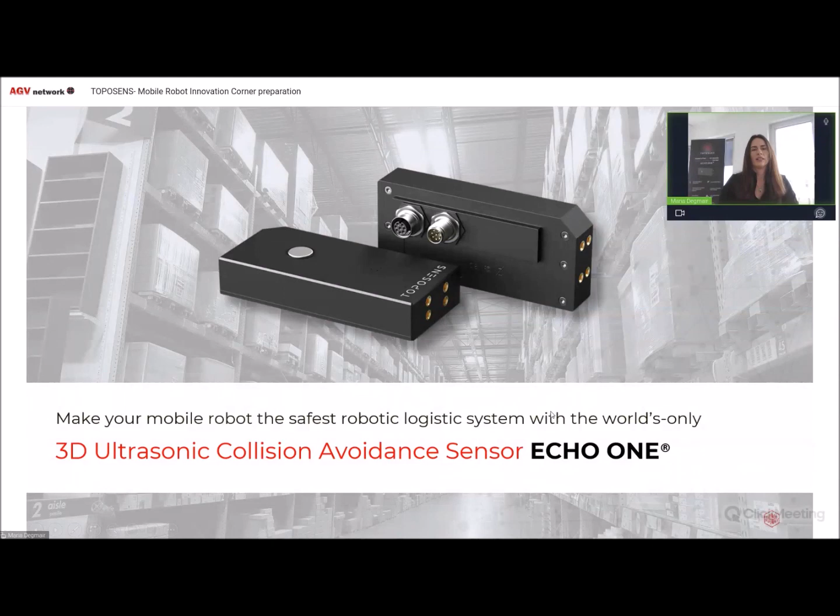Now, going straight into it, this is it. This is our, or should we say, the world's first and only 3D ultrasonic sensor for collision avoidance in mobile robots. This is what it looks like. And now, why is there a need for that at all in the current sort of market?

Now, the problem is, as we all know, and everybody working with AGVs and AMRs and anything that moves autonomously, is that there is always a risk of collisions, especially in busy factories and warehouses. And when these collisions occur, the costs can usually be very, very high. We have a figure here: anything from 100K to up to 1 million per year per factory, highlighting the need for a collision avoidance that is adequate enough to get this figure down.

And where we have problems mainly is with, as we know, anything that moves autonomously across the floor needs sensors to sense and navigate around the path. And there are different types of sensors based on the underlying physics. The main sensors used these days are optical sensors, such as lidars and cameras. They do have difficulties, and this is only due to the physics behind them.

They do have difficulties detecting when the environment conditions are not ideal, when they're unfavorable, and when the surface is of a certain structure that makes it a little bit more difficult for these optical sensors, such as transparent surfaces, mirror surfaces, or when the lighting conditions are too bright or too dark. As a consequence, objects such as the forklift forks that are typically black are difficult to detect. And that poses a risk of damage to AGVs or in mixed operations, also when workers are around and about.

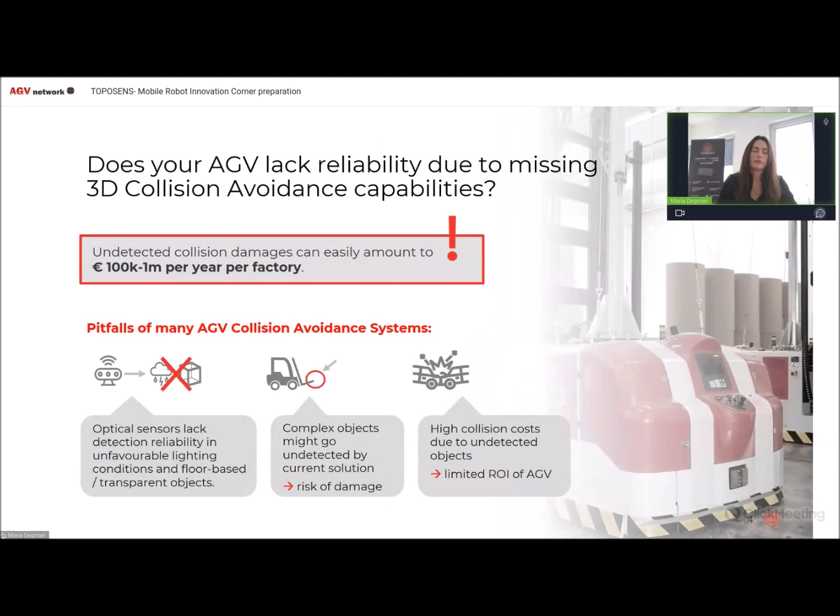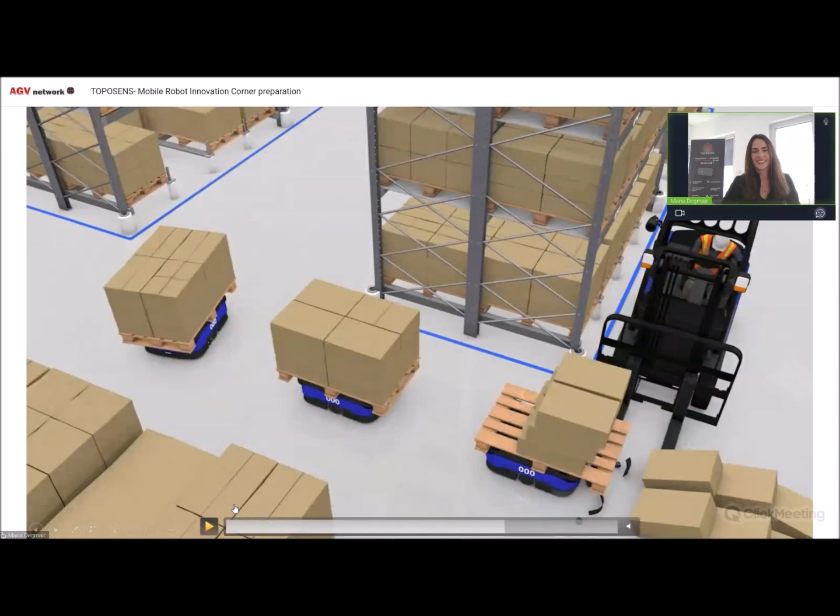Now, that in turn limits, as you can imagine, the return on investment on AGVs and AMR systems as a whole. Now, this is what can happen, as you can see here. I'm just going to pause this video now, so you can get the idea behind what I'm saying, which is when you have the very important 2D safety lidars that any really well-functioning system should have anyway.

They, as the word suggests, sense on a 2D plane. So anything above or below that 2D plane does not get detected. So if we have forklift forks coming in from the side at a height that is below or above the scanning plane of that 2D LiDAR, then this can happen, as you can see here. So basically, that's just a quick video, so carry on from there.

And this is where the ultrasonic sensing comes into play. Now, just quickly diving into the physics behind it. So it is based on time of flight, combined with triangulation. And then what makes it so special is the patented algorithms that we have in our processing unit behind it.

Now, as you can see here on the bottom, that little bat, you may wonder why there is a bat, but it's actually quite simple and straightforward. We all know bats fly at night in total darkness, unaided by anything other than their own inbuilt sensory system. We call it echolocation.

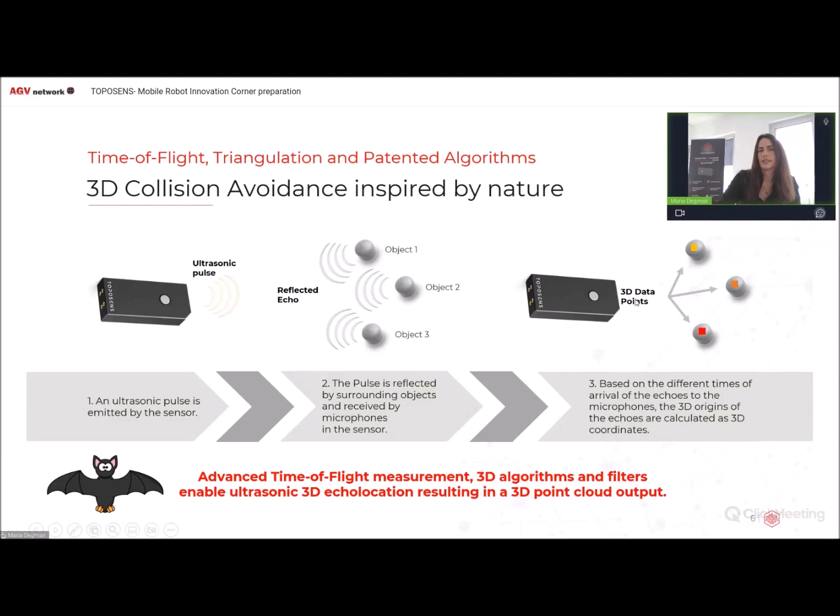So you don't just get the distance from an object, but also the height relative to the sensor, and whether it's to the left or right of the sensor, relative to sensor positioning. So you have the X, Y, Z coordinates. That is what we call our turnkey 3D collision avoidance system.

So with the system you get from us, you get the sensor just shown, and then the collision avoidance software, housed in this Toposens processing unit here. That makes for very safe operations on top of other sensors you may have built into your system already. Now, just a few key specs that are very important to note.

The detection range we have is anything from near field up to 3 meters. This is normally with a 75 millimeter pole detection, so we have this reference standard case.

And then the field of view in the near field is important to note, because we offer a sensing solution that is very good for the near field, which is very important in collision avoidance. So you cover that space right in front of the sensor, right in front of your AGV or mobile robot, whatever you have, and at that close distance you get a coverage of up to 160 degrees, which is a very large opening angle.

As you go further away, closer to the 3 meter detection range, it reduces to up to 110 degrees. This is purely based on the physics of ultrasound, and I'm going to show you a video in a minute where you can see the opening angle based on the physics of the ultrasound wave.

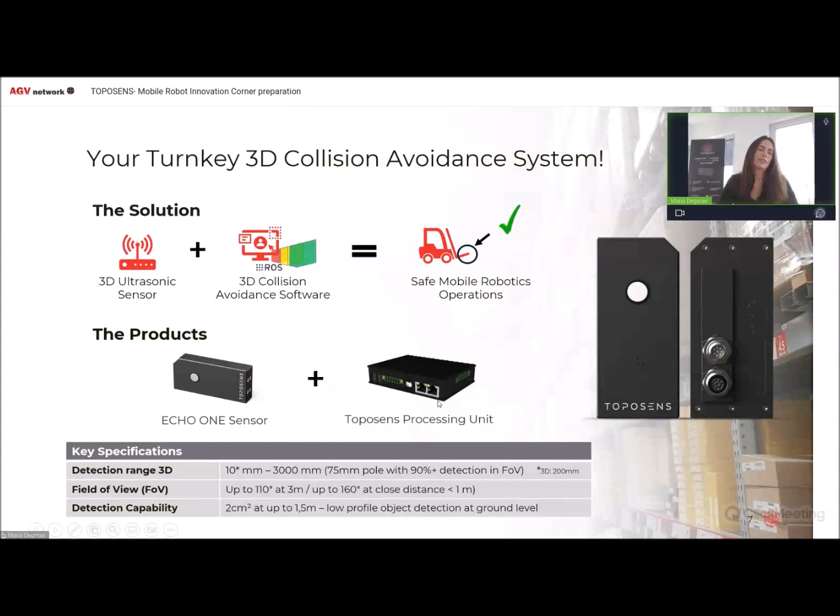Now, this system, as I've mentioned, with the processing unit, is very easy to use as well, because you get with it a graphical user interface, so you have that GUI here. Let's quickly go over that. And if you want more information at any point about the technology, you can see us at Logimat, but I'll get to this in a minute, or drop us a message or give us a call.

But just to guide you through this quickly, here you have the region monitor view where you can set your regions. Important to note is we have 2 zones: a warning and a stopping zone. Anything detected in the warning zone, the system, our collision avoidance system, will trigger an input to the mobile robot to slow down.

Anything detected in the inner zone, which is a very important zone just in front of the sensor, triggers a stop command. So here you have a warning command, and here you have a stop command. These are where you can set the zones.

These 2 zones are dynamic and freely adjustable, up to a maximum of 3 meters, as I've said before. You can also adjust the height, depending on where your sensor is set on the mobile robot, and the length. This is like a top-down, bird's eye view, and you can also set the width. Now you have your different filter settings depending on use case and what you want to get out of it.

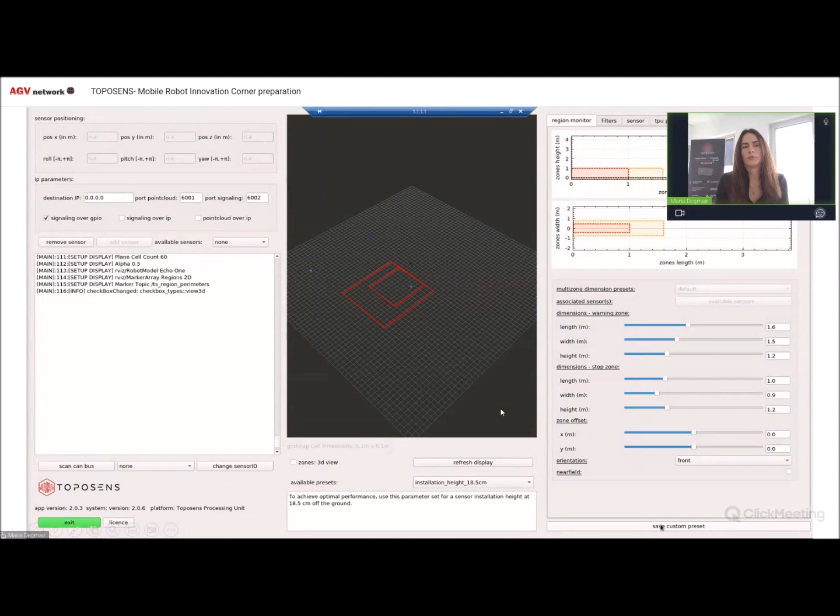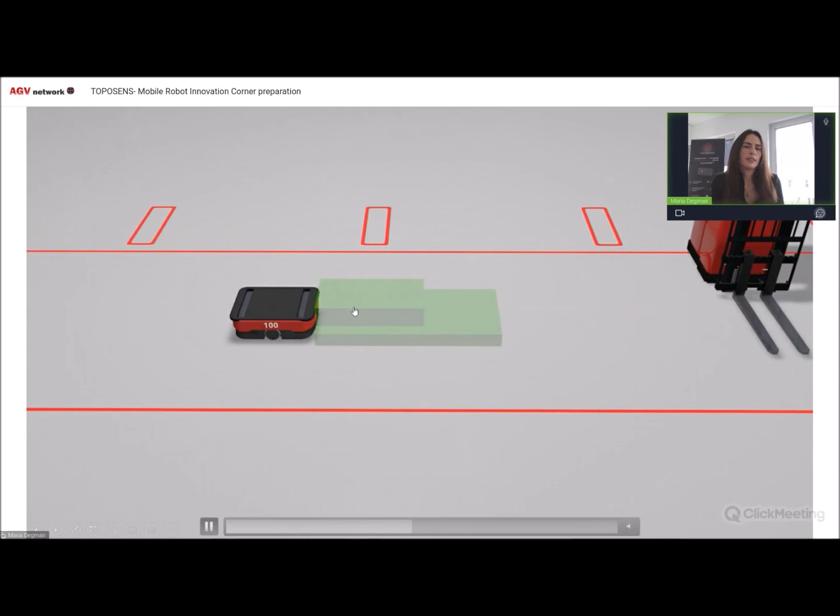Now, this is just a little video in between the slides to show you exactly what happens. This is a little AGV, the top load, and here you have these zones - the stopping zone and the warning zone. I'm just going to pause this. You can see these forklift forks are detected. This is how it works in principle: they're detected in the outer zone, and then also detected in the stopping zone. So the AGV has already started slowing down, and now it is actually stopping.

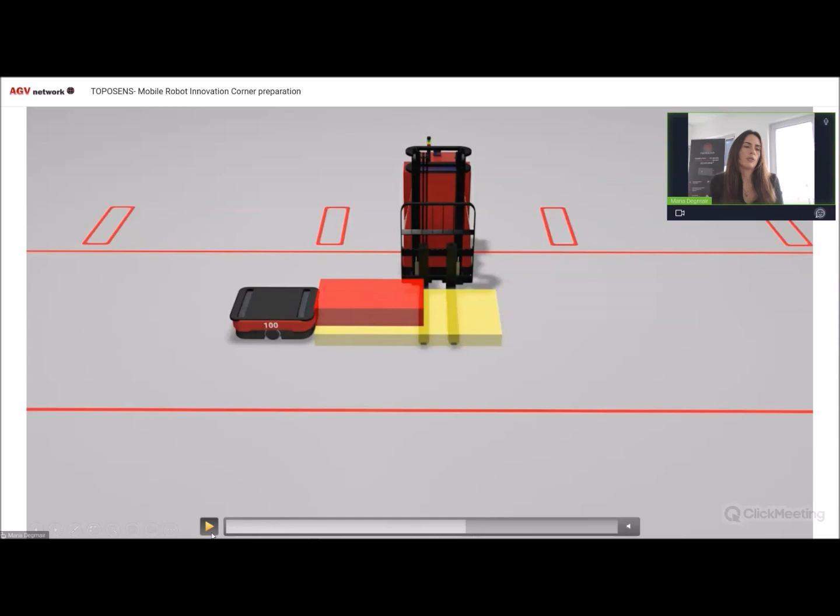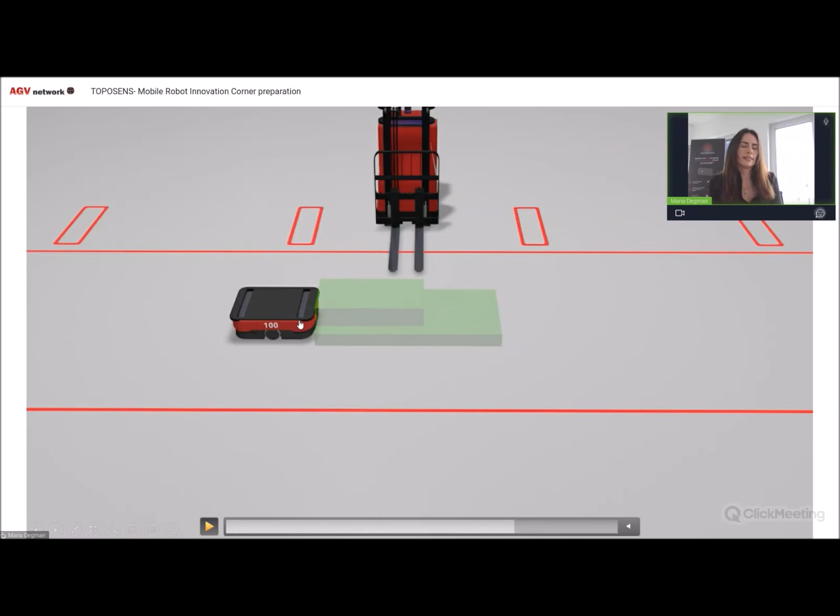Once that object, the hazard, is removed, the system triggers an off signal. So now the zones are not violated anymore - it's on/off, basically an IO signal. The coast is clear, so to say, and the AGV then moves on again. Here we have the same with pallets, for example - that makes the AGV slow down and stop, and then once the coast is clear, it'll move on again.

Now, just to go a little bit over the advantages that our system offers compared to other sensor systems - as I've said before, in terms of 3D collision avoidance, you have the problem of reliable detection performance. With this system, due to the physics and the sophisticated algorithms behind it, we can see small and difficult-to-see objects very well.

As I said in the beginning of my presentation, optical sensors, although they work really well in other situations, when environmental conditions are not favorable, such as lack of light, have great difficulties detecting certain objects. Sound-based sensing is practically immune to that, because this is just the nature of physics - sound travels through anything and gets bounced off anything, regardless of any light or non-existent light.

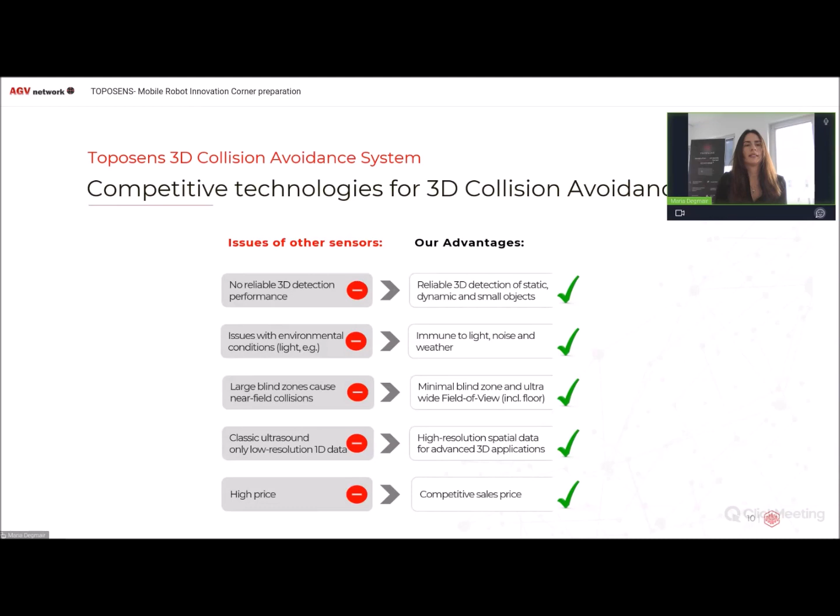And we are competitively priced compared to a lot of more expensive sensor solutions, and that's just due to the hardware as well and the way it's set up.

Now, what I've told you about the advantages can very easily be whittled down to three key benefits of our USPs. The first one is we look at this in terms of detecting the undetectable, where other sensor systems have difficulties detecting, we can detect these undetectable objects. And we offer full coverage, navigation in difficult surroundings, and short sensing from 20 centimeters on, which is a huge benefit that any reliable, safe AGV system should have anyway.

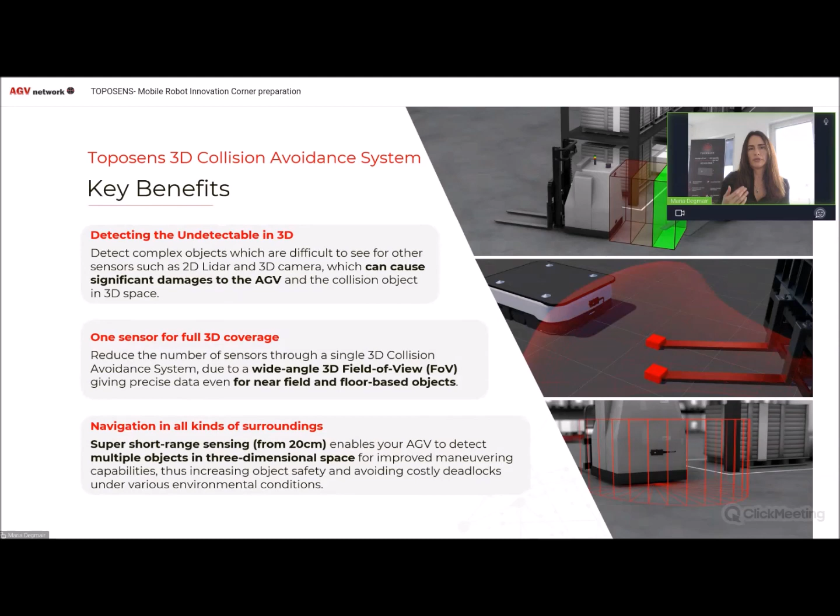And that in turn gives you this really good customer value that you can convey to your customers, that you can have improved satisfaction because your AGVs are equipped with these sensors and other optical sensors. You should always have a 2D safety LiDAR anyway with it, but this just rounds off your perfect mobile robot sensing solution.

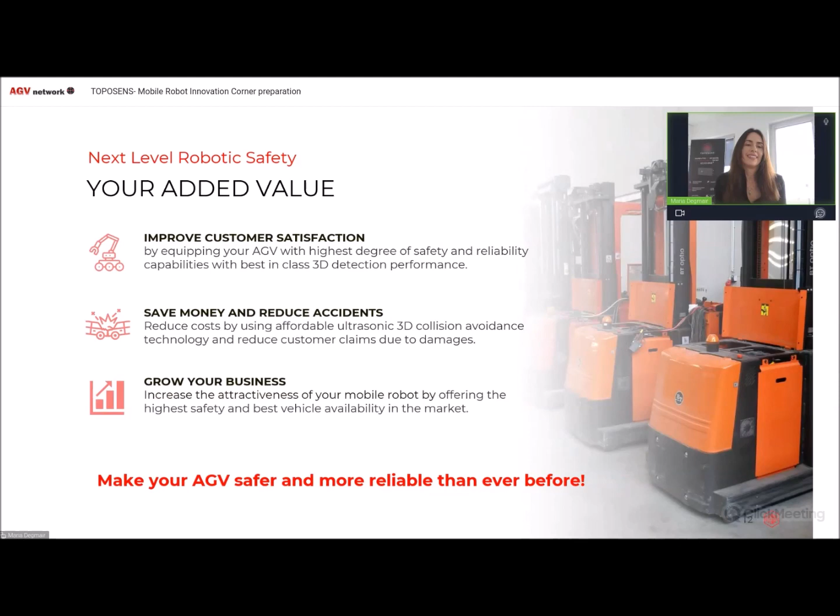It saves you money and reduces accidents, I've already covered that, and obviously with that you can grow your business. So basically that is what it's all about in a nutshell.

Let's not forget, in this webinar we're not going to go too much into the finite details of it all, but if you have any questions, always get in touch with us, or see us at Logimat. But yeah, that's basically what you get with our system.

So you get that sensor, you get a processor unit, and it's also worth noting that it can be used as a standalone system. So you get the I/O ports that signal you the zone violations - either zone violation is on, when something is detected in the warning or stopping zone, or you get the off, so the coast is clear again, if an object has been removed or another AGV has crossed the path successfully and is out of the way.

Or you can use it in a sensor fusion version, and then a pre-processed point cloud is accessible via Ethernet. You can also use this system as a retrofit if you've already got your AGV system with LiDARs incorporated, or cameras, whatever you may have, and you just want to add this extra layer of safety with an ultrasonic sensor. You can also have that design-in version if you start from scratch and put it all together and use it like that.

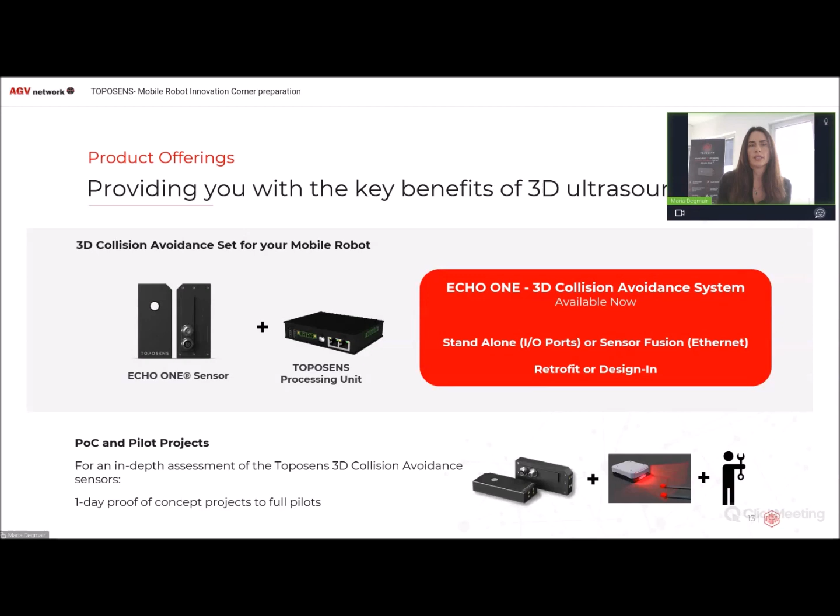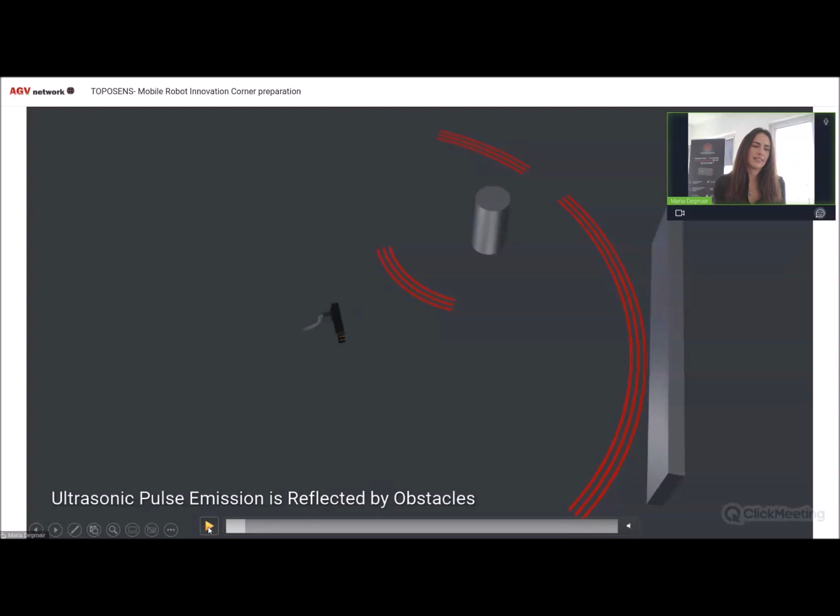Now I'll just show you another video that will nicely put everything I've said into a visually pleasing video. I'm just going to pause this because, as I said at the start of the presentation, this is how the physics work, and I always find it's much better to visualize it than to just get told about it.

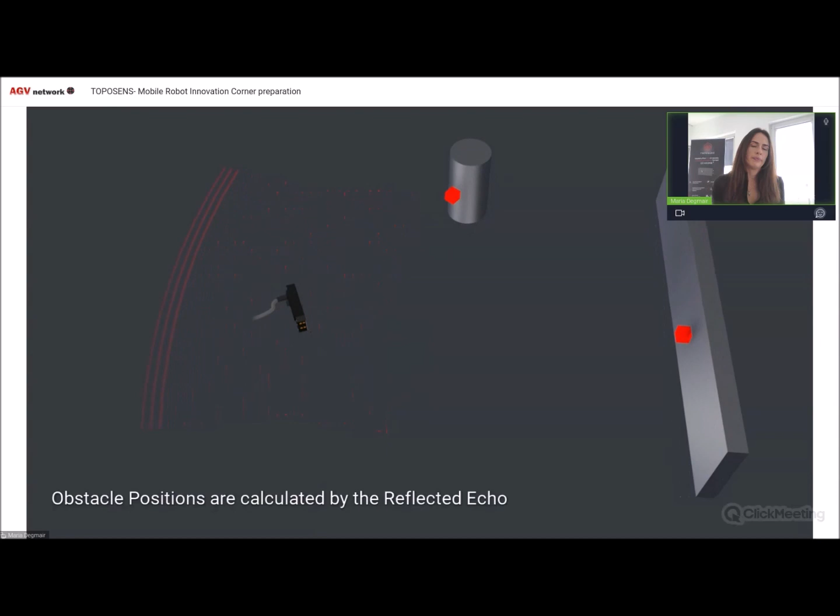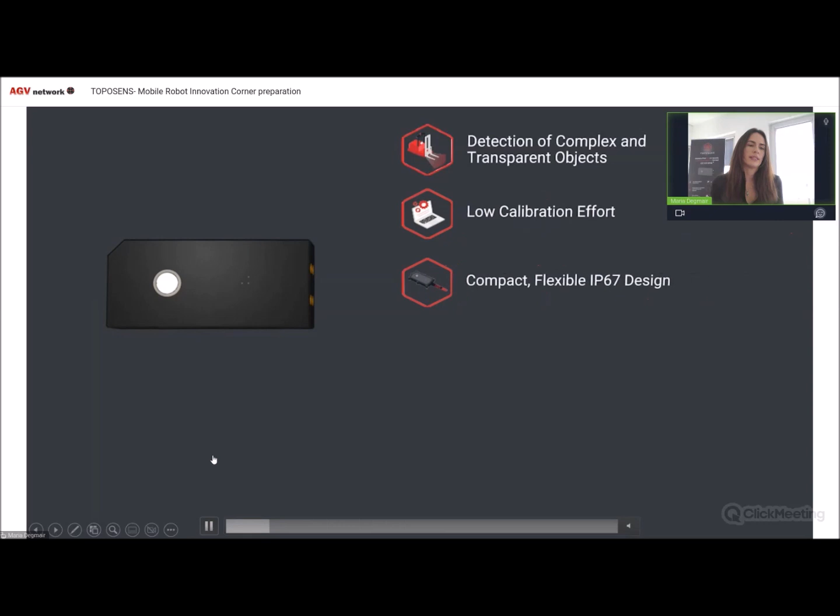So here you can see the reflections coming back that bounce off objects in the vicinity of a sensor, and then you get these two dots. Now here you have the point cloud, and then you have the points. And here you have these USPs that we always say we offer with our system.

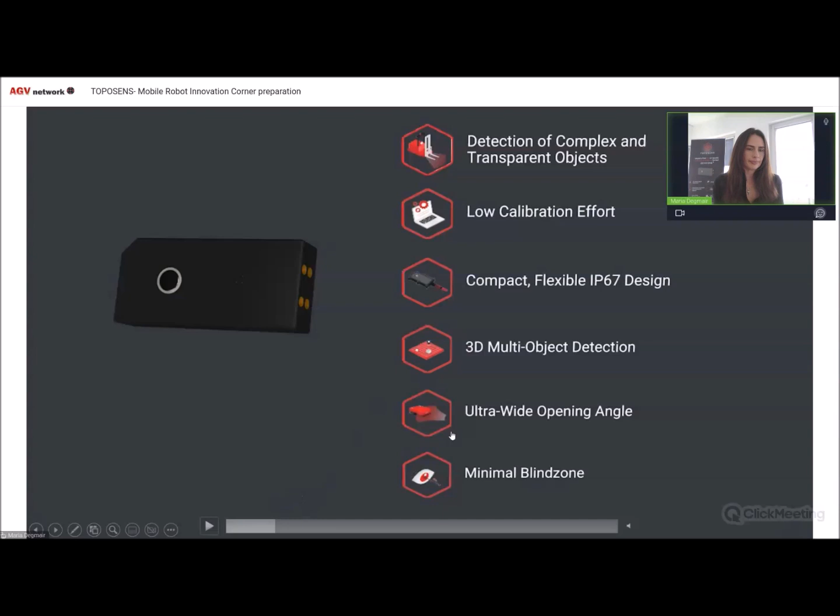I think it's more or less self-explanatory after everything I've said. As I said, low calibration effort, it's easy to integrate. We are fully IP67, which also means the sensor can be used outdoors - rain, it doesn't matter, sunshine. As I said, the physics behind ultrasound mean it just works anywhere, regardless of the conditions. It can detect multiple objects, usually up to around 25 in that zone. And then obviously we covered these bits.

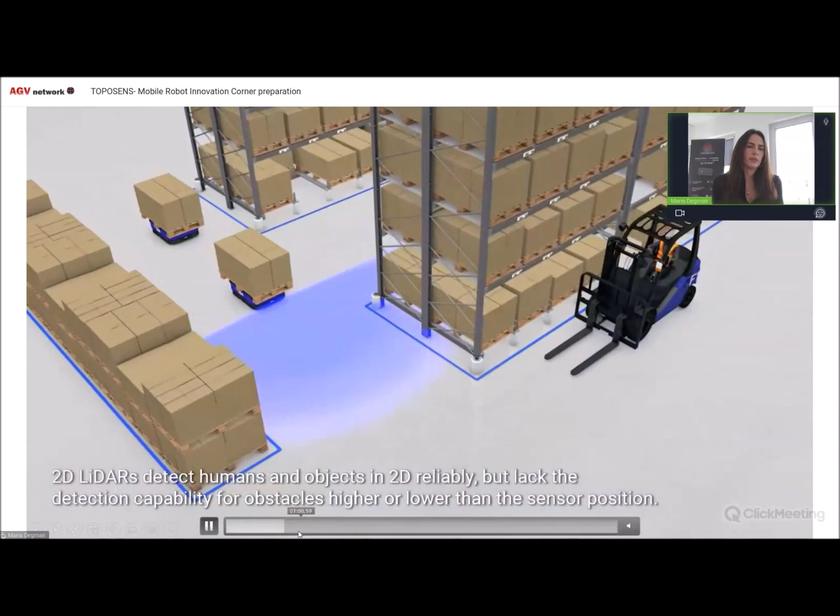Now that is the ECHO ONE sensor. This is what we've already seen, so we can just skip that. But then again, it's a very short section anyway, so let's just have a look at that again.

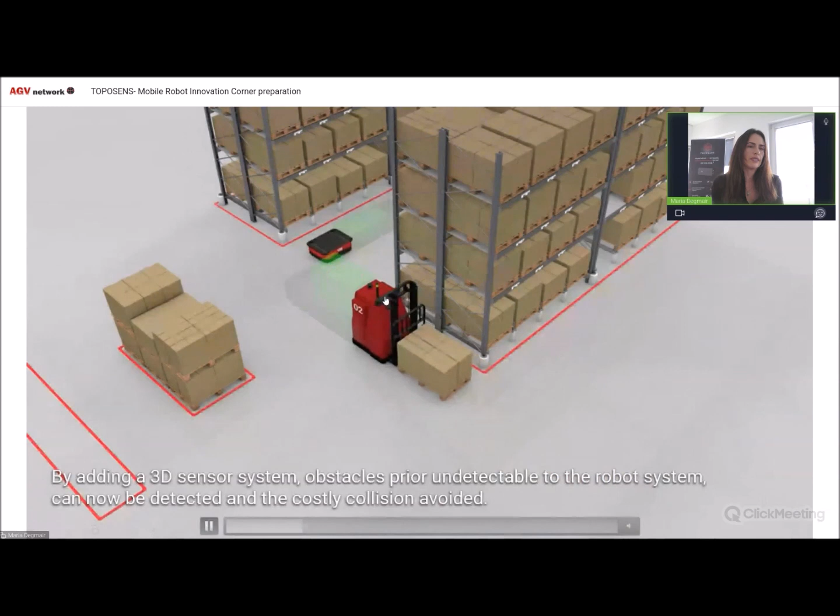You can see what happens when the 2D sensor systems only scan in one plane. Now this is what 3D scanning looks like, with these 3D warning and stopping zones. Once they're activated, the system slows down or stops depending on the zone. As a reminder, violation of the outer warning zone, shown in yellow, means slowing down. Violation of the more crucial inner stopping zone means the system comes to a halt.

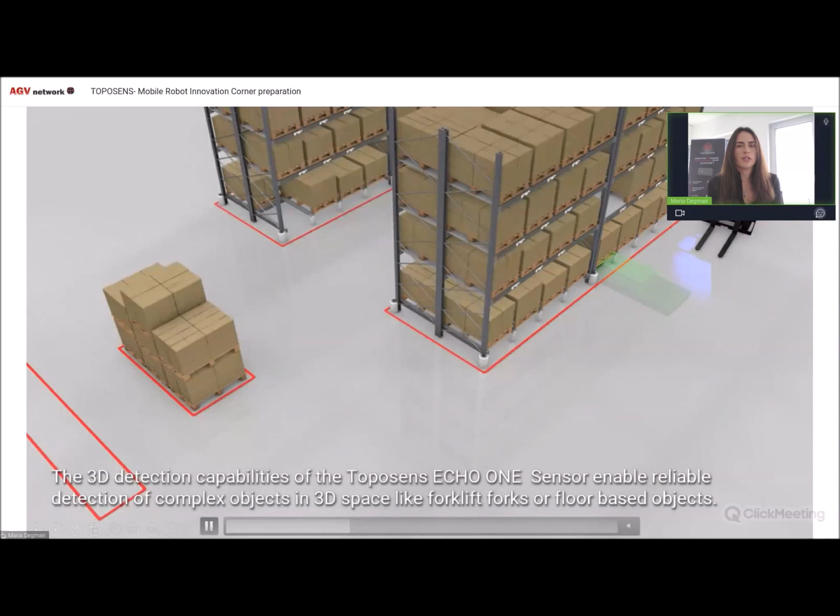I think we can probably just skip that. This basically shows a mixed operation. Here you have a manned forklift, still gets detected by that little AGV down here with the sensor on, stops, and then moves off once that's out of the way.

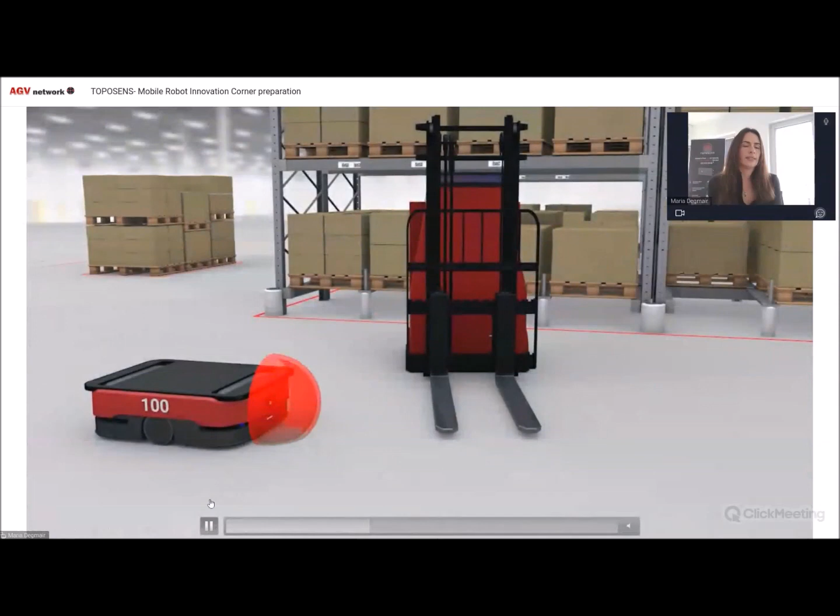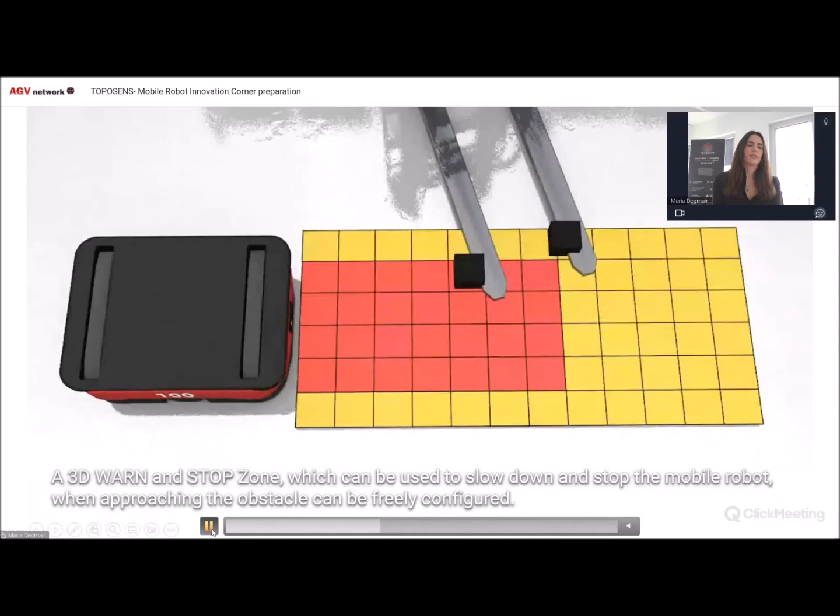Now on here you can see what exactly happens when objects are detected, such as these forklift forks. You have that wave bouncing off, coming back, being received by the microphones on the sensor, and then you get these two coordinates here. Once that moves out of the way, the coast is clear again, it's green, and the system moves on.

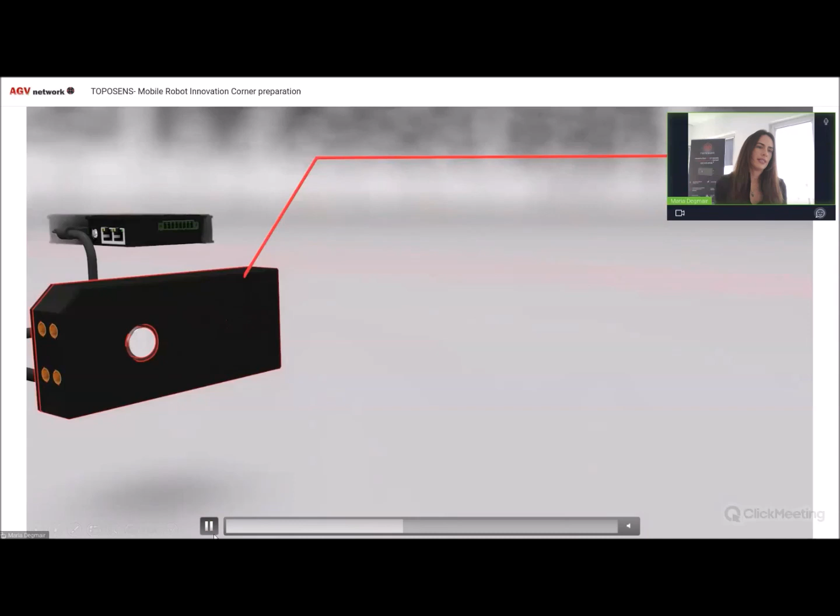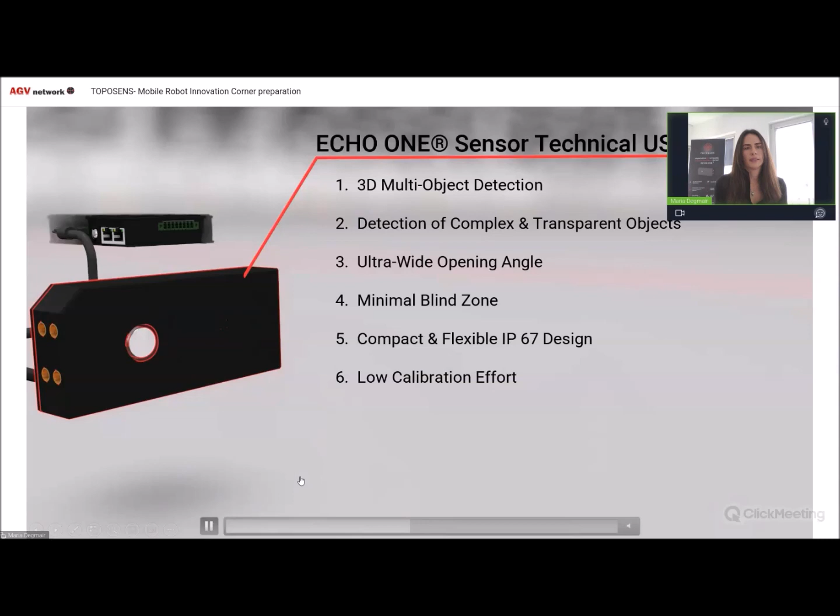This is quite a nice illustration of what happens, I'll come up to it in a minute. This is the sensor you have here, and this is how it gets integrated into an AGV or AMR or any other mobile robot. The USPs we've covered, we all know them now. This is the Toposens processing unit.

Let's pause that for a minute. So you have the unit here attached to the sensor, acting as a gateway, and it houses the noise filters, which I said previously is a very crucial part of the overall system that makes it so special. It's very sophisticated, and you can set your parameters there, as I showed you in the GUI. You also have the warning and stopping zones in there. Let's move on.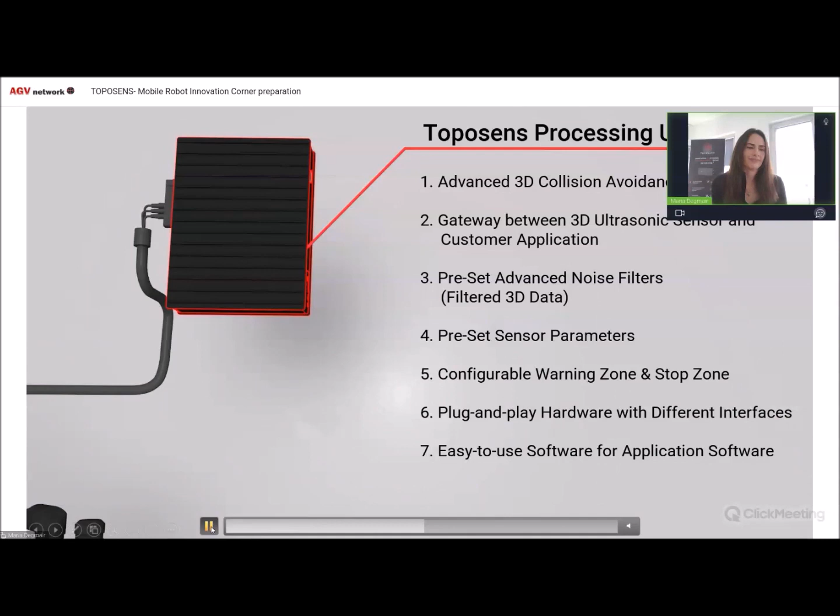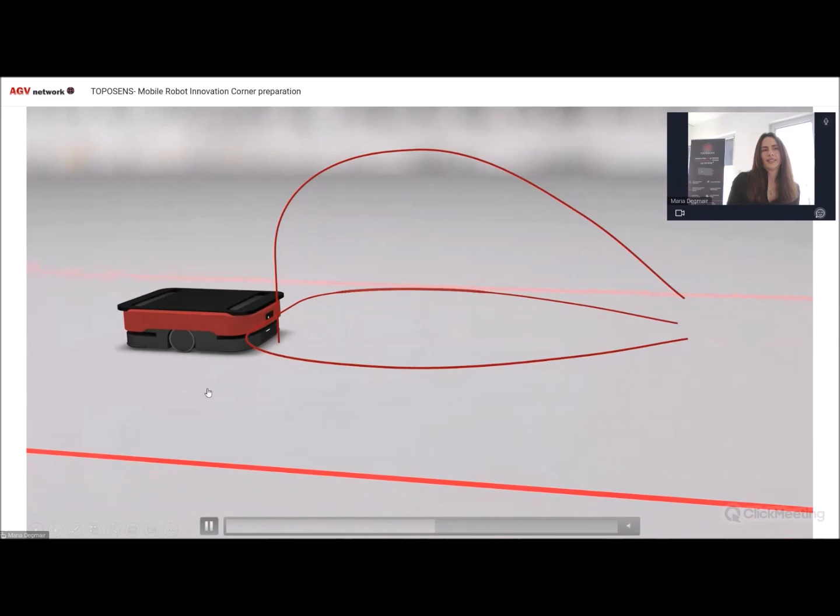So this is the all-important field of view. If you remember, I told you I was going to show you the field of view in the video, so this is what it looks like. In front of the sensor you have that massive opening angle, that field of view, and then that reduces—this is literally down to the physics of ultrasound—as you get away from the sensor. So in that 3 meters coverage it gets smaller, as you can see. This is why it's important to note that this solution is most effective in near field sensing, which is the crucial bit for collision avoidance anyway.

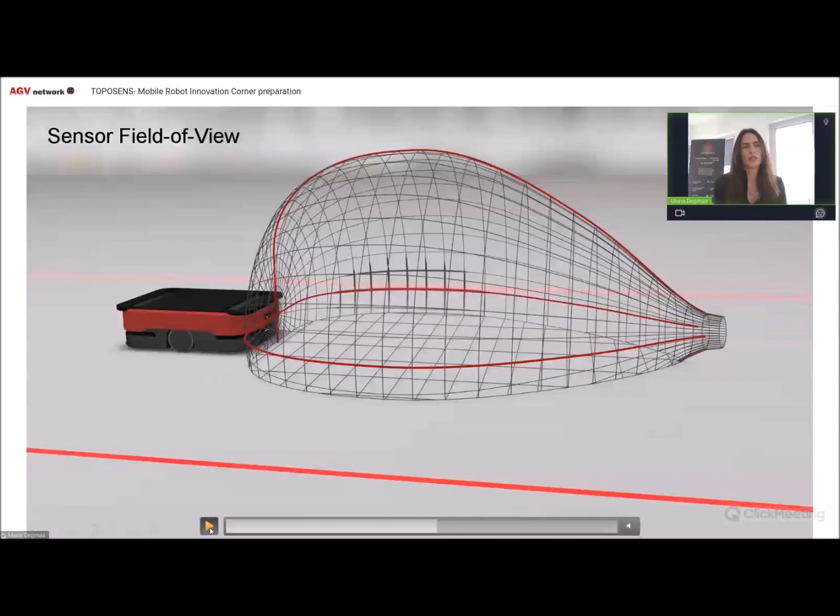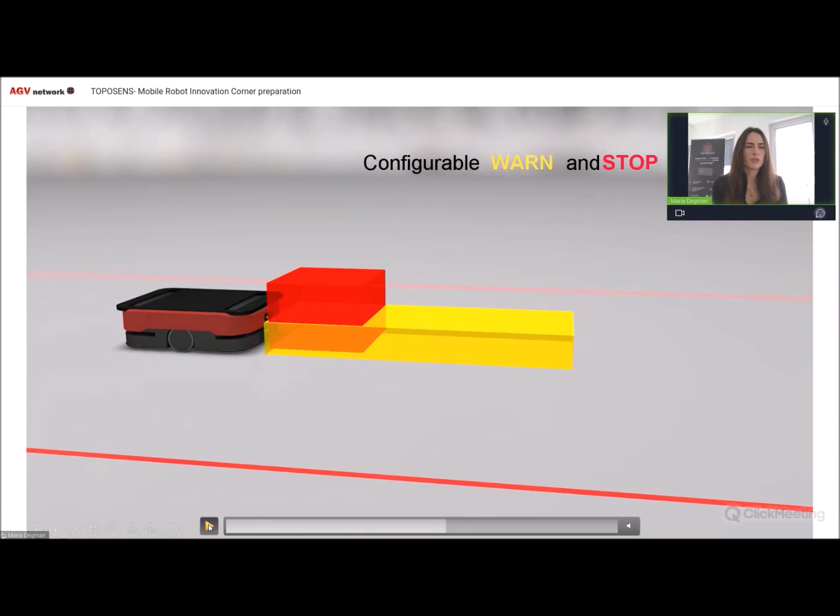Here you can see the warning and stopping zones and how they're fully configurable depending on how you want to use it, and on whereabouts on the AGV or mobile robot the sensor is positioned. Here you can see it's very close to the ground, so you have your reduced zones, but depending on how you want to use it, you can fully position and set these zones.

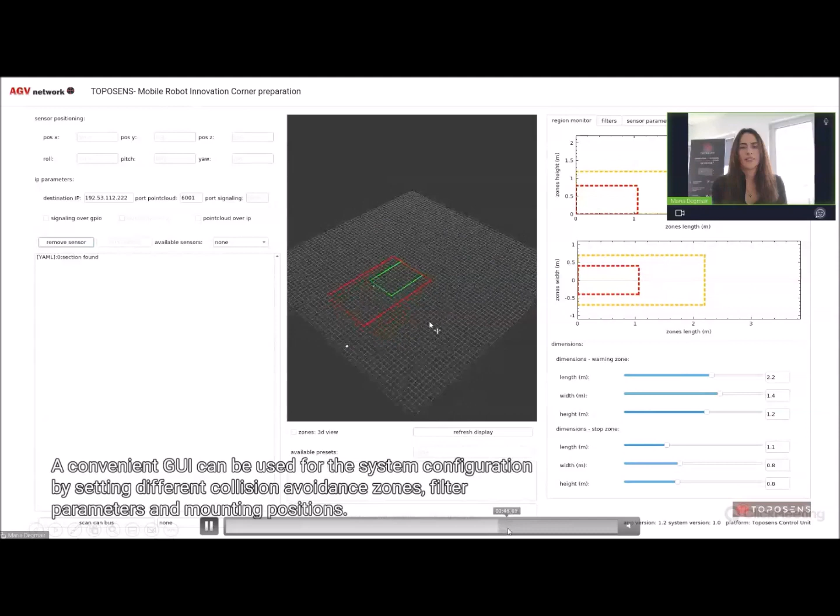And then just showing you the benefits I've covered already anyway. And then you can see the GUI—okay, we've had that bit, let's just skip that. But it's quite interesting to see as well how the zones are set. And then here you have that 3D view.

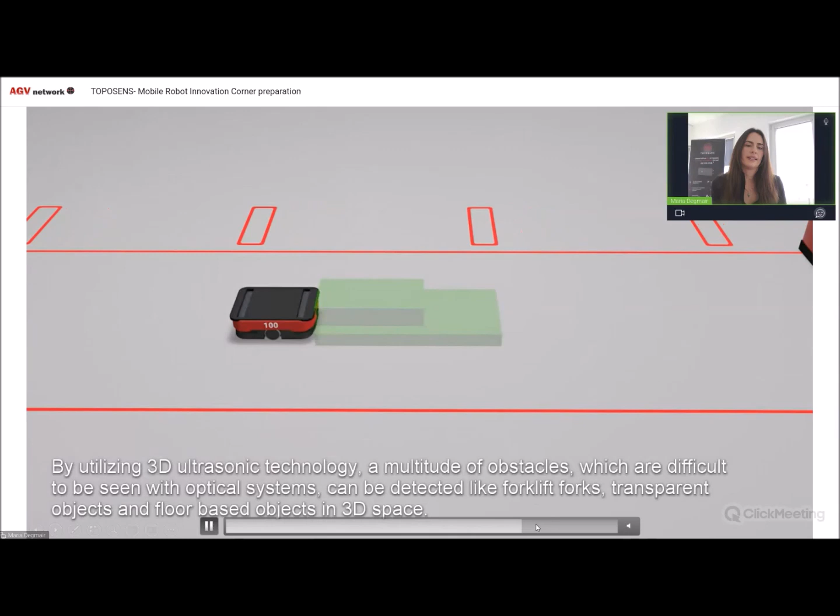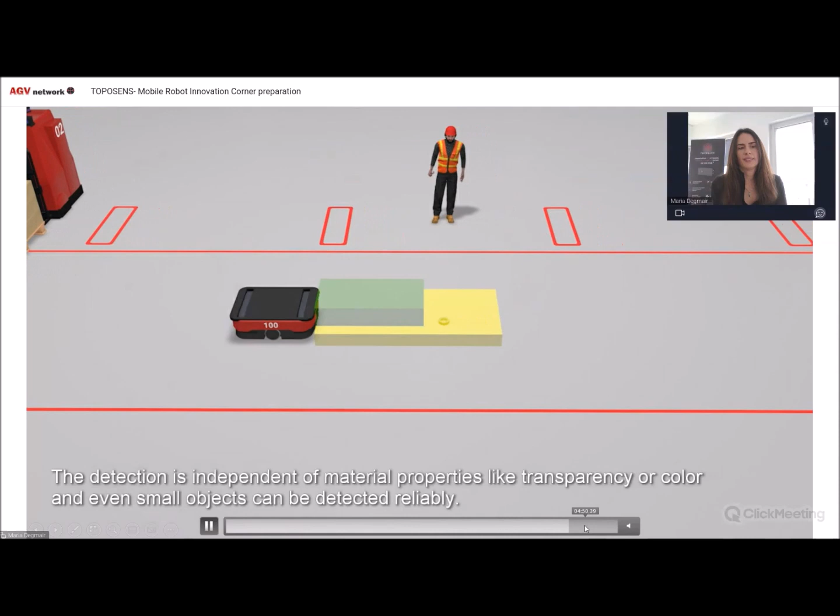And this is what it looks like again when the collision avoidance functionality is in full operation. But we've seen that, so we're going to skip that. This is important to notice as well, because these are very small objects on the floor and they get detected as well, just like that. And that's just about it.

I'm just going to fast forward this a little bit, and let's get to, oops, just jumping ahead here, to our last slide.